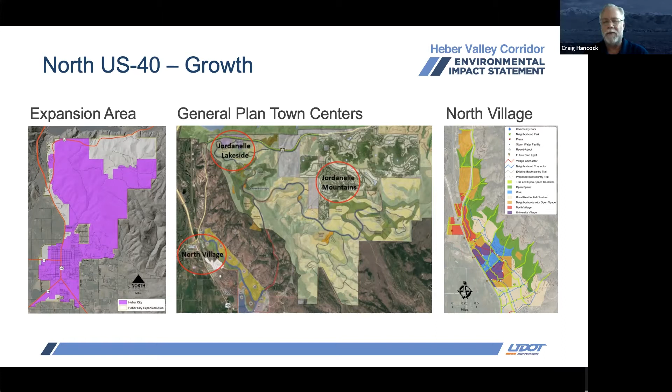In addition to the comments that I previously talked about, we also received over 80 suggestions to modify alternatives presented to the public, and also some suggestions for additional new alternatives. Some of these suggestions included making improvements to US 40 north of downtown Heber City. Suggestions on US 40 included adding center barrier and frontage roads.

Based on these comments, UDOT developed 6 new alternatives to take through our screening process. These new improvements included adding an additional one-way couplet on 100 East. And we also added 5 additional west bypass alternatives. 3 of these alternatives would extend further north through the North Fields area. 1 alternative would extend farther south through Daniels. And then 1 alternative added a 13 South connection to the WB alternative.

UDOT also modified the bypass alternatives that tie into US 40 at 800 North by including improvements to US 40 north of downtown Heber City all the way to SR 32 for a complete alternative that extends from SR 32 to US 189. Not every suggestion resulted in new alternatives. Alternatives that would not meet the project objectives were not included. Alternatives that were outside the scope of the project also weren't included. Or if we had duplicative alternatives, we also didn't include those as well.

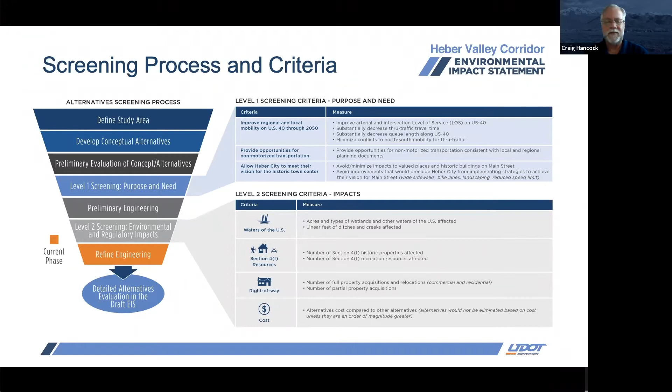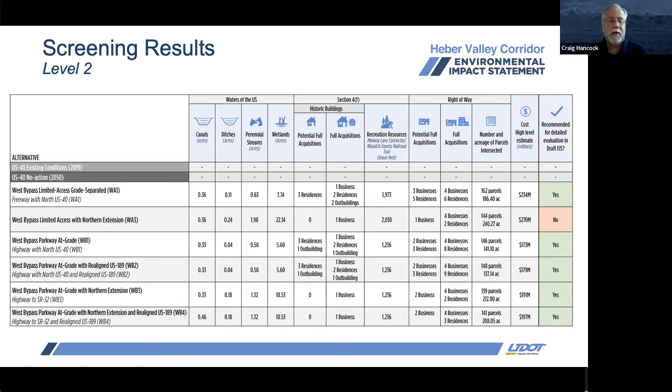Impacts range from 1 building to 8 buildings that could be demolished. All the historic residences and businesses are counted in the right-of-way column as well. The Section 4(f) recreation resources impacts are to trails and can easily be mitigated by realigning the trails. Cost estimates are very high level and include right-of-way and construction. These estimates could change when the alternatives are refined to a greater degree. It is also important to note that the estimates are in today's dollars.

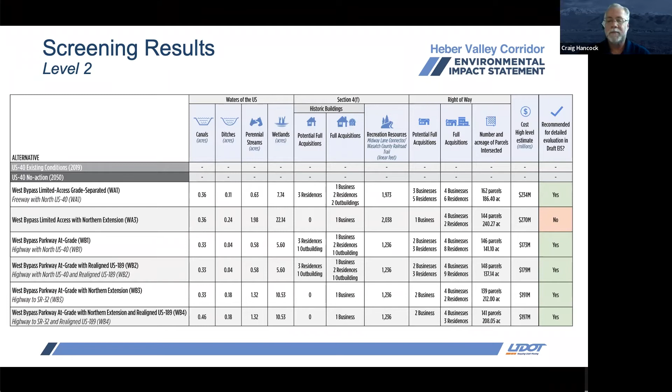Based on our level 2 screening, WA3, which was one of our freeway options, was eliminated because it would perform similarly to other alternatives, but would have greater impacts to waters of the U.S., as you can see in the table here.

Also, another differentiator is in the northern portion, which includes improvements on existing US 40 or is a new road, which extends all the way to SR 32. And then the other main differentiator is the connections on the south and whether or not US 189 is realigned on the south end.

I do want to point out that we understand that the North Fields are an important resource to many in the community, and we appreciate the detailed comments many of you have provided about this resource. The NEPA process requires that we evaluate a reasonable range of alternatives and provide an opportunity for public input on the range of alternatives. We did receive a number of comments during the alternative comment period back in October that we should extend the bypass further to the north to account for the planned development and growth on North US 40.

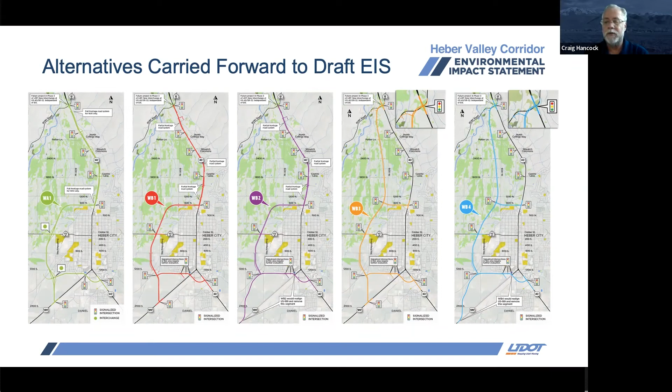There were people who were concerned that the bypass that ties into US 40 at 800 North is not a long-term solution. And so we were required to consider these comments. In a minute, I'll talk about each of these alternatives in detail, but I would like to talk about our cross sections that we're proposing to be used. We have several cross sections depending on where you're at on the alignment.

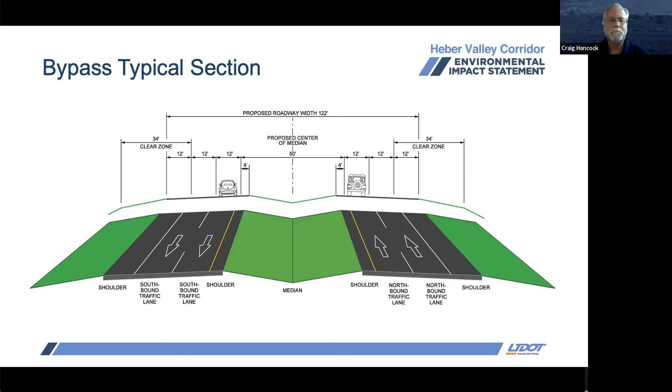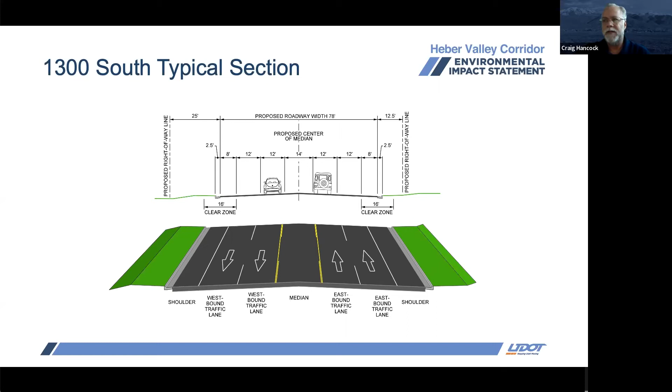This typical section here is our 13 South typical. This is similar to a typical urban section. Here you'll notice that we have 4 12-foot standard travel lanes, but our median is much narrower. It's now separating the lanes with a 14-foot median. The shoulders are a little narrower, and we include a curb and gutter, which is consistent with the portion of 13 South that is currently out there today.

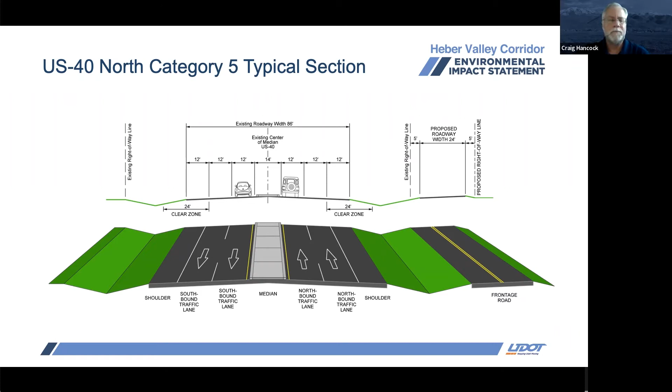What I'd like to do now is go into detail on each of the 5 alternatives. The first alternative we'll talk about is our alternative WA1, which is a freeway alternative. This alternative can be categorized as one that favors mobility over access, as compared to the other alternatives. With this alternative, we generally follow the corridor preservation alignment that has been previously acquired. It ties in to US 40 at 800 North, and then continues on from 800 North up to SR 32, where we do make several improvements.

This is a grade separated alternative. We have grade separations at 13 South, which includes, in this case, an interchange. We also have an interchange grade separation at SR 113. Looking at the south end, vehicles can also access the bypass between US 40 and US 189 at the interchange with 113. Vehicles on the bypass would not have to stop at SR 113 or at 1300 South. This bypass would also be what we call an access category 1, which means that there would be no other access allowed in the future except at the interchanges.

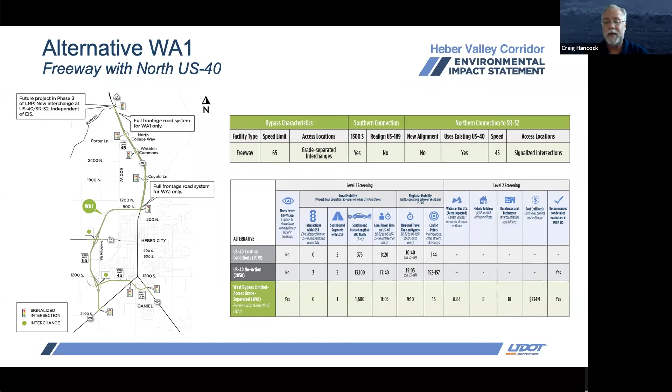Looking at the impacts on this table, preliminary impacts with WA1, there's approximately 8.84 acres of impacts to waters of the US. So that's our wetlands, streams, ditches, and canals, which would be filled in. We also have 8 potential historic buildings that could be demolished. And with this alternative, we estimate 18 residents and businesses which would need to be relocated. This alternative would cost approximately $234 million in today's dollars. Note that these impacts and costs are at a very high level and would likely change as we evaluate the alternatives in more detail.

Next, I'll talk about the WB alternatives. These are the highway alternatives as we've discussed. Once again, the WB1 alternative and all the other WB alternatives generally follow the corridor preservation alignment, similar to the WA1 alternative that we just looked at. This alternative is a highway type function. It operates at a lower speed at 55 miles per hour on the bypass portion, but it does provide more access as compared to the WA1 alternative. Another main difference between the highway alternatives and the previous alternative is that all the intersections are at grade, and that there are no interchanges.

Like the WA1 alternative, the bypass segment extends from US 40 at 800 North, bypasses Heber City on the west side, and then connects to US 189 at Southfield Road. It would be at grade with signalized intersections at 800 North, SR 113, 1300 South, and US 189. The bypass would be an access category 3, which means access would only be allowed at signalized intersections. Unsignalized intersections and driveways would not be permitted. The speed limit on the bypass would be 55 miles per hour.

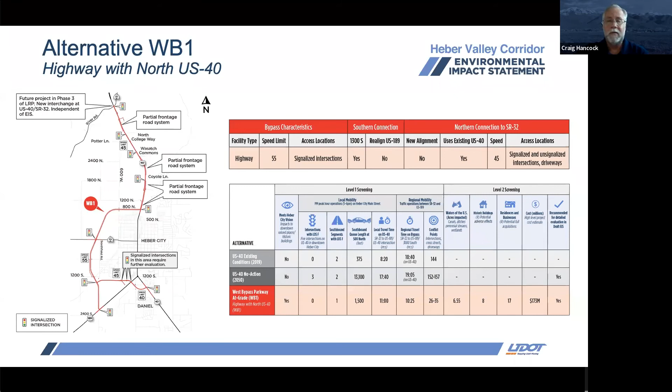Looking at the regional travel time, on the bypass from SR 32 to US 189 would be about 10 minutes and 25 seconds, just over a minute longer as compared to the WA1 alternative. Travel time on the bypass with alternative WB1 would be a savings of about 9 minutes as compared to the do nothing alternative. Looking at the preliminary impacts, they are fairly similar to the WA1 alternative, but it would cost less. There's approximately 6.6 acres of waters of the U.S. that are impacted. 8 potential historic buildings could be demolished, and then 17 residents and businesses would be relocated. This alternative would cost about $173 million in today's dollars.

Next alternative we'll talk about is the WB2 alternative. This is very similar to the one that we just looked at, with the main difference being that this alternative has US 189 realigned onto the bypass. The realignment of US 189 is from about Edwards Lane to 1300 South. And with this alternative, the existing US 189 would be removed. Under this alternative, there would be more traffic on 13 South because it would become the US 189. It would have similar connections to the WB1 alternative that we just looked at, with intersections at Industrial Parkway, 1300 West, US 189, and South 40. Like WB1, there would not be a connection to South Daniels Road. North 40 would be the same as with the previous WB1 alternative, with the partial frontage road system.

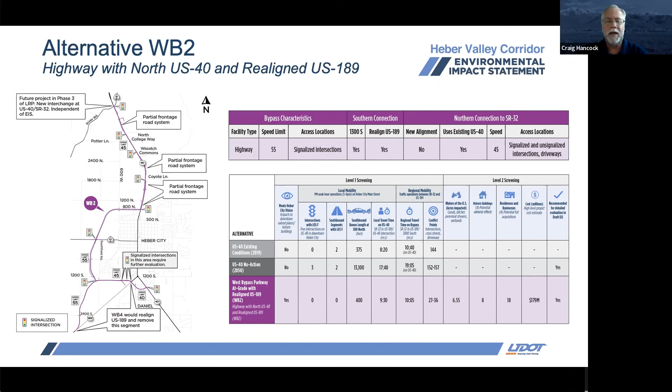Looking at the performance table, you'll notice that the local mobility is improved over the previous alternatives. All segments perform better, with none of them having a level of service F. And also, queuing at 500 North is significantly improved. Preliminary impacts on this alternative are similar to the previous one, with very similar impacts to the waters of the U.S., historic buildings, and relocations of residents and businesses. And then the costs are very similar to what you saw on the WB1 alternative, coming in at $179 million in today's dollars. The next alternative we'll look at is the WB3 alternative.

This alternative is similar to the WB1 alternative that we looked at, except that the bypass would extend all the way up to SR 32, and there would be no improvements made to North US 40. Once again, this alternative assumes an interchange at SR 32 would be a separate project. The access on this bypass alternative also is assumed to be a Category 3, which means that access would be allowed at signalized intersections only. No unsignalized intersections or driveways would be permitted. The 13th South is the same as the WB1, and as I mentioned, on the north, there would be no improvements made to North 40. However, the same 3 intersections would be signalized when warranted.

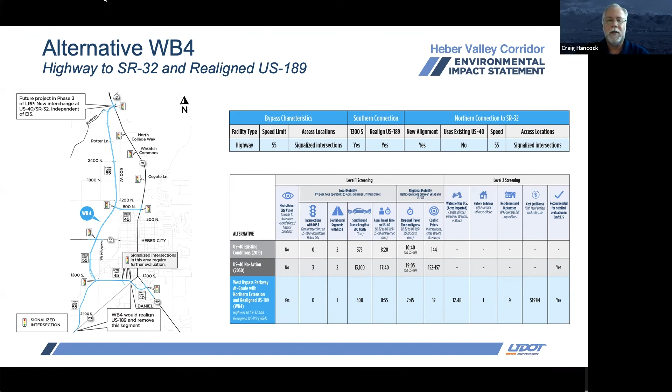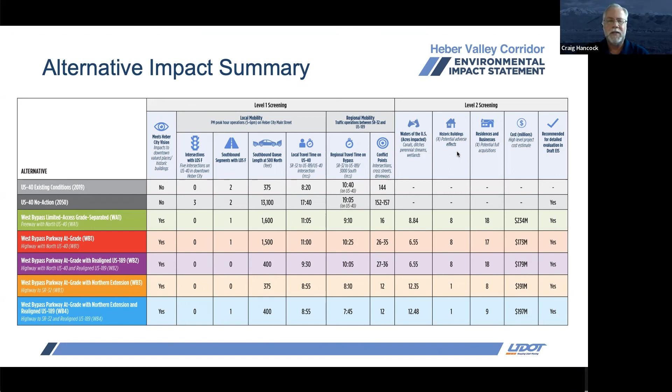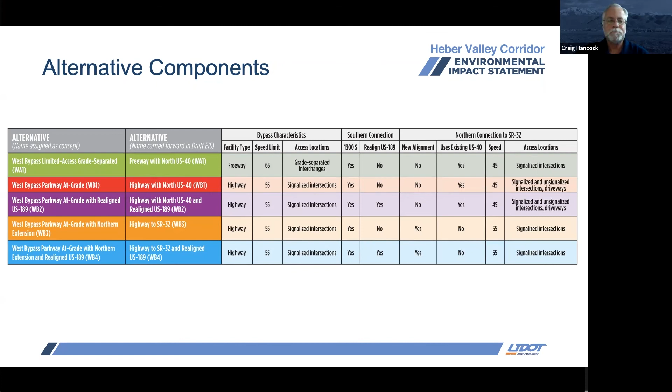So this is what I prepared to present as far as the results of our screening alternatives. Next, I'd like to turn the time over to Naomi, who will be talking about our public involvement process. Thanks, Craig. I'm going to speak a little bit about the current comment period and the importance of public involvement. So the current comment period will run through July 22nd of this year.

To provide your comments, we ask that you use the formal channels provided: the project website, email, a mailed letter, a voicemail, or a text message to the project hotline. All those avenues are listed on this slide. Please focus your comments on the range of alternatives that we've presented, the criteria that was used to screen alternatives, the screening process, and the results of the initial impact analysis. This will help ensure that your comments are informed and captured in the official record.

As a reminder, comments made on the social media platforms are a great way to share information, but are not considered formal input in the study process and will not be documented in the project record. If you are aware of anyone in the community without internet access or who needs certain accommodations, please notify the project team at 801-210-0498 for assistance with viewing materials or providing comments. Hard copies of project information are also available to view at the following locations: Heber City Administration Building, Wasatch County Administration Building, and the Wasatch County Public Library.